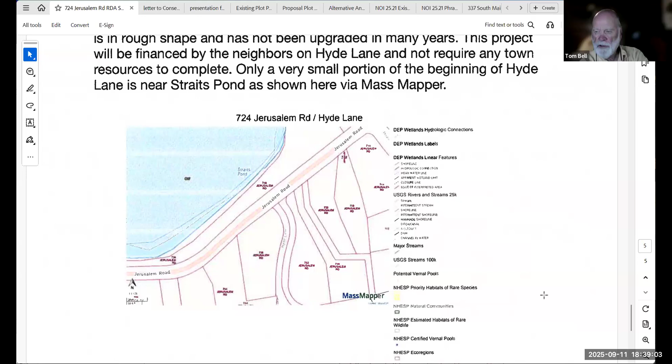Any questions from commissioners off the bat? Yeah, will the whole driveway be repaved or just the apron at the end at Jerusalem Road? Yeah, the entire driveway, it's about 800 feet all the way up the hill. Okay.

Thank you, no other questions? Okay, any other commissioners? Steve, anything? I have no questions. Okay. Kathy? All set, no comments. Straight ahead, thank you. Will? No, it all looks fine to me. Thank you. And Sanjay, anything to add or questions? No questions. Thank you. Okay.

I will make a motion to close the public hearing for Request for Determination of Applicability 25-11 at 724 Jerusalem Road, and issue a negative determination for work within the 100-foot buffer — negative 3 for work in the buffer zone. And then if you want any conditions, you can add them. Yes, I make a motion to issue a negative 3 determination of applicability for the proposed work as shown in the submission documents, with our standard conditions.

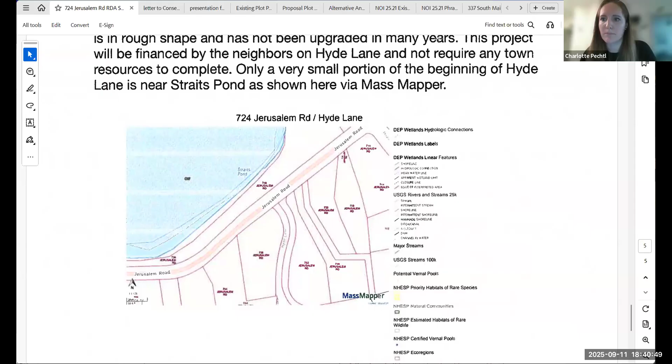There's no special conditions for this, Charlotte, right? You don't have anything unless you want to add? No, I don't think so. Do I have a second? Tom Bell. Second. Thank you.

All right, then I'll take a roll call vote of commissioners. Tom Bell? Aye. Steve Magnell? Aye. Kathy Berrigan? Aye. Sanjay Fernando? Aye. Will Ashton? Aye. And Chris McIntyre, aye. That vote passes 6-0-0. And that hearing is closed.

Thank you. Thank you. Thanks, Tony.

This one should be brief, to refresh everyone's memory from the last meeting. It was an after-the-fact permit required from an enforcement order, which was lifted at the last meeting upon approval from the commission and review of the after-the-fact permit. We were waiting on a DEP file number, so we couldn't issue the order of conditions without it. So there was no further discussion needed. The commission voted to close the public hearing, but within the 21-day time frame you have to issue the order of conditions, so we're pretty much at that mark right now.

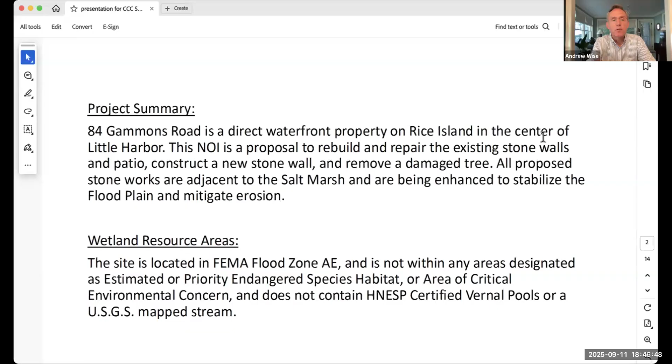84 Gammons Road is at the end of Gammons, Rice Island, which is right in the middle of Little Harbor, Jerusalem, Atlantic here, and we are on the north side. I have a series of photos that will give you a perspective of the property and what we're seeking to do. Just a drone shot from a few years ago, looking south. Gammons Road is right along the front of the home. Our property line starts right here and ends here, and the existing walls are all in the rear of the house along Little Harbor.

Again, this is the north side. This wall is about 60 feet long, and then there are about 4 segments of walls, all in between a lot of ledge here, and that's what we're requesting to rebuild. There's also an existing patio right here, stone patio, pervious, and on this side, the western side, that's where we would like to build a wall. I'll get into this a little bit later, but I'll point out there is an existing wall right here, which we can show when I pull up the current plot plan.

The tree that I mentioned is located right here in front of our guest house. We have a guest house and a main house. Also very important, as I noted in that first slide, key here is stabilization. There's been significant erosion over many years, and that's why we need to rebuild these walls. Of particular concern are these 2 large oak trees, about 24 inches in diameter, that are also at risk because of erosion here for these dilapidated walls.

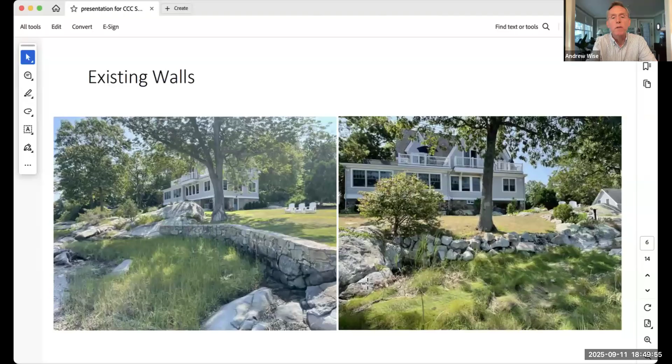This wall is in better shape, that will need mostly pointing, while other walls need more rebuilding. Not many years ago, these walls were a little further into the marsh, and they were poorly redone, aggregated closer into the yard. The salt marsh moved in, but because they weren't done properly, that has perpetuated more erosion. This is the patio we're seeking, with about a 2.5-foot wall behind it.

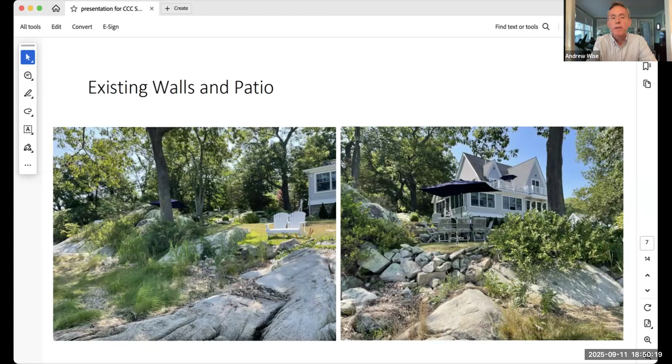The next set of pictures are on the western side, and this was where we'd like to put up that new wall. This view shows where the wall would go, right along here. You can see it's almost a very natural place, almost as if erosion has created this spot for a wall to go.

About 12 years ago, when we bought the property, we had an NOI in 2013 for renovating the two houses. Then we also planted 6 cedar trees along here for stabilization, and now those are also at risk because of erosion in this area.

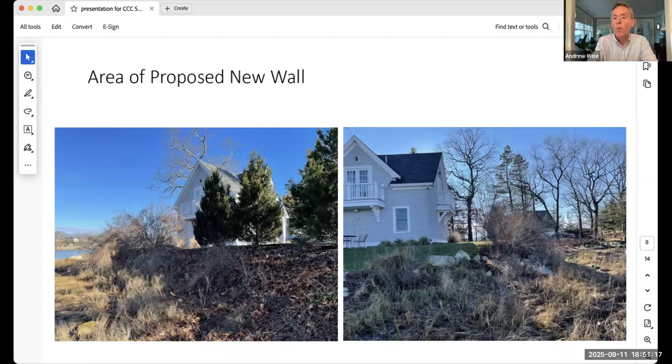This picture again shows where we'd like to put this wall. Some stones here were also moved forward many years ago to address what is the most serious erosion on this corner. This picture shows the driveway, the 6 trees, and the wall would be here just to stabilize this component of the coastal bank.

The last picture is of the tree. This is a black walnut tree, a pretty tree. We really would like to not take it down, but over the last couple of years it's had some infestation, which has gotten a lot worse.

We've noticed recently. About 5 years ago, I had Bartlett Tree look at it. I haven't had them look at it recently, but I will. We're using this as an opportunity to seek your permission so that when an arborist tells us it should be taken down because it's endangering the house or falling into the salt marsh, we'll do it. We're not seeking to do it immediately, but we're monitoring that tree.

I've included a couple slides just from a historical perspective. Our property, we understand, was the first one built upon, from a land plan from 1927. Then in 1956, the property was divided in two, and both houses were rented out.

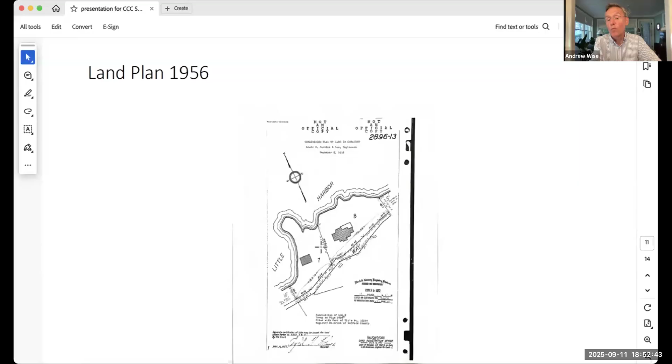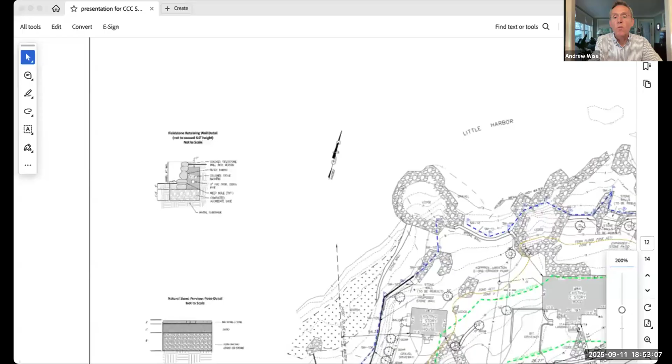And then we have our existing plot plan today from our survey. I'm just going to zoom in a little bit, but if we took more time, you could look at that 1927, 1956, and today. Although those aren't detailed survey plans, they do show the erosion. Whoops, to be careful when I zoom in that I don't change slides as I move that up for you to see.

So what the surveyor has shown is what I mentioned earlier - we presume this was done 100 years ago, a long time ago, when this was all presumably just land, part of the yard. This was a stone wall, and that exists - it goes all along here. But then again, there has been erosion over time.

As you saw from the pictures, just a lot of ledge here. This area may be in better shape, but again, over time there's been a lot of erosion. Last year with those super king tides, we noticed there was more erosion here than in the 12 previous years. So again, we're just seeking to rebuild these walls - this is the patio area here, and then we'd put that new wall here to address that erosion.

I have a couple of the engineer slides just on those walls, but I thought I could go into some detail on the construction proposal. Let me shrink that down again. We will bring in local fieldstone, and we just want all work to match all of the other stone work that's consistent with Cohasset, consistent with the way the current property looks in character.

We feel, as does the contractor and the wetland engineer, Brad Holmes, that the guest house driveway is ideally situated for a staging site. It's right next to that new wall, and it also serves as a nice area to maneuver other materials to the rest of the yard.

Charlotte and I have discussed how the work would be done to minimize any impact on the salt marsh. I think typical remediation efforts would be to put a silt sock in place, but in this case, the only way to really do that would be to put it in the marsh, which is not preferable.

We want to keep everybody out of the marsh. Brad felt ideally this lot works because the work can be done in the yard bordering the salt marsh, staying out of the marsh but doing most of the work by hand, except for the long new wall, where their recommendation is to use a mini excavator on the land side, so the scoop can dig that trench without impacting the salt marsh.

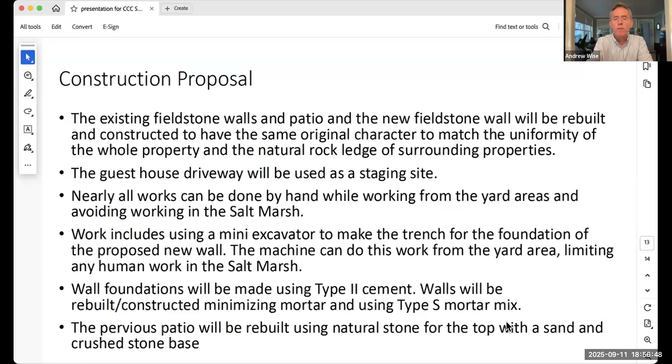So hopefully that's a pretty quick review. I'll open it up to any questions, or I can go back to the existing plot plan if you'd like to address any questions the commissioners have. Thank you for the presentation.

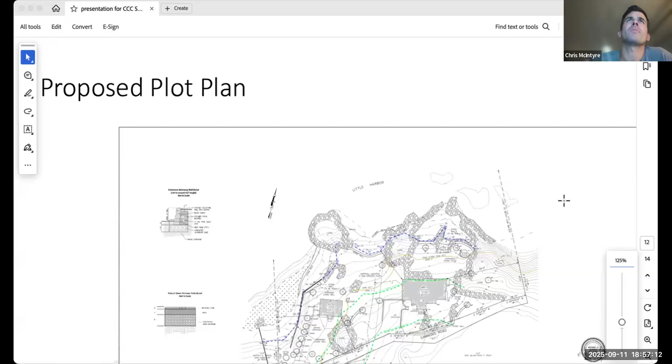The existing walls that you referred to, when were those built? Particularly the stone wall that's more reinforced with mortar - was that part of your 2013 renovation?

No, we believe those walls were all done about 100 years ago. You can see some repair, but in terms of construction, when we had the carriage house rebuilt in 2013, that's all hand-done granite block. The stonemasons thought the wall back here, with bigger stones on the bottom, was done a long time ago - maybe 175 years, but unlikely in the last 50 years, particularly when the houses were done. That would have been part of the whole process. We think it was the 1927 timeframe when the lot was developed.

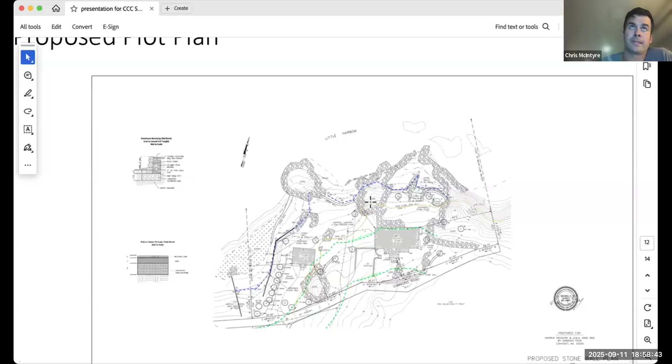And the purpose of the walls is to do what? Did you want to use the walls to prevent further erosion of the bank to the west and north of your guest house primarily? Yes, that's where the new walls are.

Would you say you get much wave energy from that side, or is it just the rising tide? Northeast would be looking out here, so this area gets wave energy.

I believe, say 100 years ago when this was done, this wall was considerably further out and got moved in over time, well before we bought the property. This wall, I think, was here a long time. This area doesn't seem to get quite as much wave energy as you mentioned, but this area does when we get those northeastern storms. That's why this area has had the most erosion, and this area has the most stone and ledge, which has protected it more.

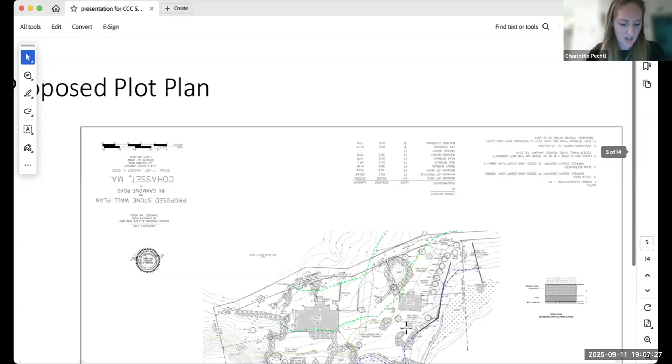I'm not going to read the whole thing, but it says except, to basically protect a structure prior to August 10th, 1978, including reconstructions of such buildings subsequent. There are also performance standards on designing them to minimize, with best available measures, adverse impacts on adjacent nearby coastal beaches due to changes in wave action, demonstrating that no method of protecting the building other than the proposed coastal engineering structure is feasible, and then protective planting designed to reduce erosion may be permitted.

So those are the performance standards as listed in the Wetlands Protection Act. We have additional language in Section 33 of our wetland regs about coastal engineering structures. We do mention the difference between existing versus proposed structures, and we say existing structures may be repaired in a location similar to the existing location, but only to the original length, and if it's protecting the existing house.

We have more on that if people want me to go into it. We do say the dissipation of wave energy should be incorporated into the design without adversely increasing wave action and potential damage to adjacent properties. And then we do mirror what I just summarized for new structures under the Wetlands Protection Act.

Okay, I guess I'm trying to seek your approval. So I would say, to me, there's no question these are all existing walls here. I could make the argument that a long time ago, when this was all part of the property, you can see on this plan there's an existing wall that was built to protect the land. It actually stops here, but it really goes further up to here, and you can see that if you looked at the property.

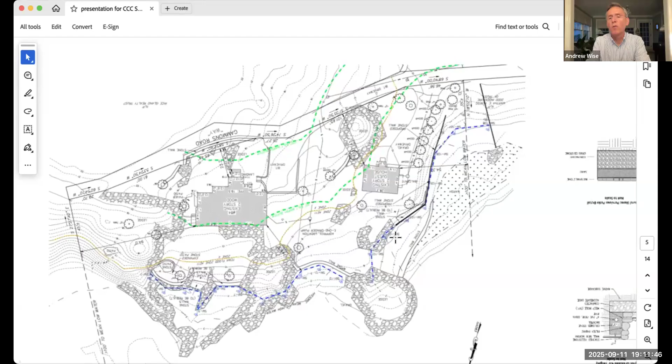I maybe would ask another question too, if I may. Charlotte, we talked about 94 North Main Street, which the commissioners recently approved. I believe that construction was done, and my understanding is that it's relatively similar. In my mind, this work is even better than what they're doing in terms of protecting their marsh, because we can do all the work above the salt marsh and in the coastal bank, and it also is a stabilization effort. So Charlotte, do you see any correlation between the discussion on 94 North Main and what we're seeking here, since that was also an existing wall that got the commission's approval recently?

Yeah, Mr. Chair, do you want me to summarize that other project? It's not on—it was a previously approved, recent project at 94 North Main Street. Sure, I don't know, okay. I voted no for that project.

Yeah, Andy, as we discussed, there was a notice of intent submitted and approved for 94 North Main Street. There was a coastal bank marsh that was eroding. The applicant had, similar to what you were describing, tried to revegetate the area, but used more woody shrubs and stuff. I don't know about grasses, but he did not have success planting those, at least at the toe of the slope. The upper end of the slope was okay, but he tried putting in filter fabric and that didn't work. So he had proposed a new wall.

I think the commission's similar concerns at the time for that project were similar to what we seem to be discussing tonight, in terms of alternatives, storm damage, and wave action. We were concerned about the dissipation of wave action and energy and what the wall would do to that. I believe Brad Holmes was involved in incorporating some plantings—I'd have to pull up the plan to see—but it did not substitute for the construction of the wall. So the construction of the wall was approved to stabilize that bank through a variance granted by the commission.

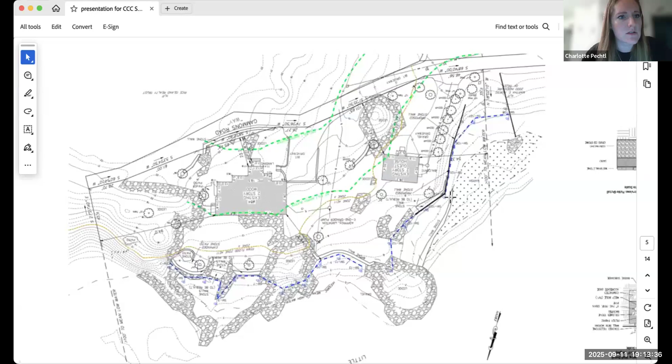Yes, thank you for that summary. I think that argues for the similarity between what the commission did approve there. Having talked to Brad about this project, I've also inspected 94 Main. I know what they did in terms of trying for plantings—they had a much longer, wider area of the toe. In this case, you can see there's a very steep toe here. About a dozen years ago we planted these six trees to stabilize that area, but below it is too steep to do anything. Brad also said there's just not enough space here to do anything.

So I think that would at least say the commission had concerns but did make the approval. And I'd say you've set precedent for what we're seeking to do as well, which is a similar type of project. We also tried similar ways to mitigate that erosion. I do believe, though, the difference in this project is that we can have our wall constructed in a manner that will be much less detrimental to the coastal bank and salt marsh than 94 North Main, because most of their work had to be done in the salt marsh, whereas we can use our driveway and the land to work above, outside of the salt marsh. It would be the same way with the existing walls here.

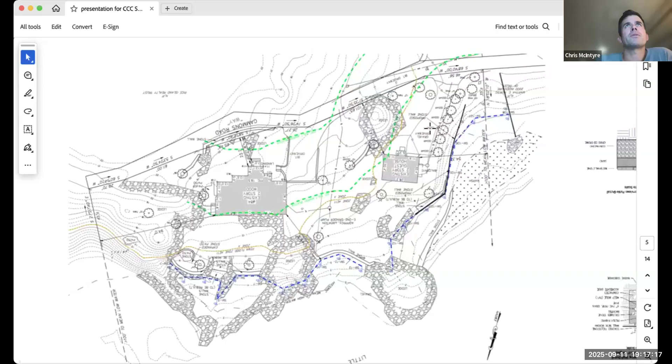Anything else, Steve? Questions? I guess the other question I had was about the existing walls that are in very bad shape—will they be reconstructed using the same stone, or are you going to take that out and bring in something completely different?

It would be mixed. So Steve, the proposal is about 20 tons of local stone, which would be mixed in with the existing stone, so they'll use what's there and add to it so it looks like a uniform wall, very similar to this wall's appearance. So same, but using the same stone plus some new. These are the ones you're reconstructing—yes, adding some new stone and using existing stone, a combination of both. It'll be the same style, same kind of vertical.

Exactly. Yes, the current ones are more of a riprap kind of wall than a wall. I know it looks a little like riprap, and that's just because of how it was piled up, but you can see the mortar in there. Those walls, I have to believe, were once similar to this, and just before we moved in—actually when we did move in shortly after—we had a contractor stack this as part of that NOI, but it is a little more vertical than what you may have seen in the picture.

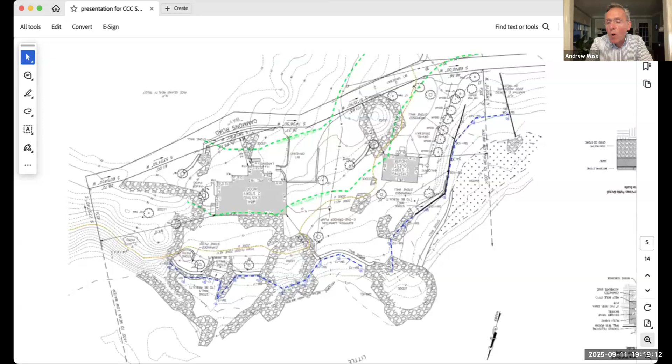This is a current patio area. We had to move it because of erosion. This patio, one time, we believe the stones did go out to the wall. Because of the erosion, we had to remove those stones just because it was sloping down and we couldn't put a table there. But the wall has already been there.

So the plan is to have the stone go all the way out to the wall. If this is the existing stones, then the new patio would go all the way out to the wall, from this wall all the way to the new wall, the rebuilt wall.

So you'd be changing the grade there as well. Yes, getting it back to what I think it originally was, level. Just filling in because there's a bit of a slope here due to erosion, it would be to fill that back in to be level.

So there is fill that would have to be planned to bring in to backfill behind the walls once they're done, again stabilizing the marsh. Behind those trees there's erosion here, so just fill behind those trees when those walls are done.

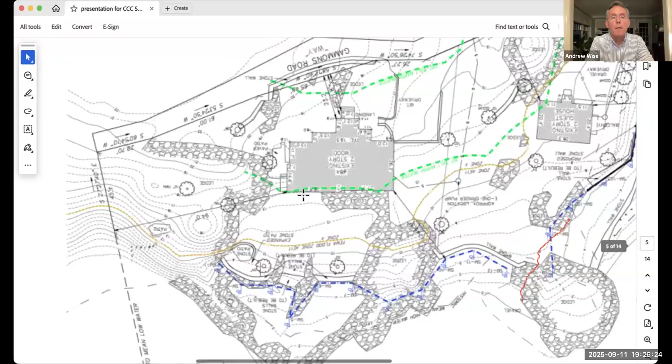Not those walls, back on the northwest side. Yeah, I don't mean these ones. I was just trying to find where we put on the - oops. Sorry, okay, when I zoom out it gets very sensitive, so let me just go down here.

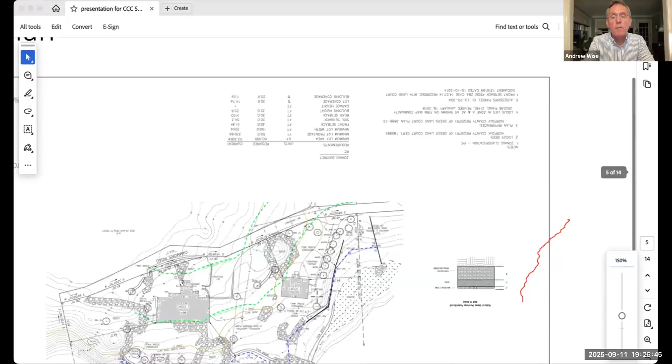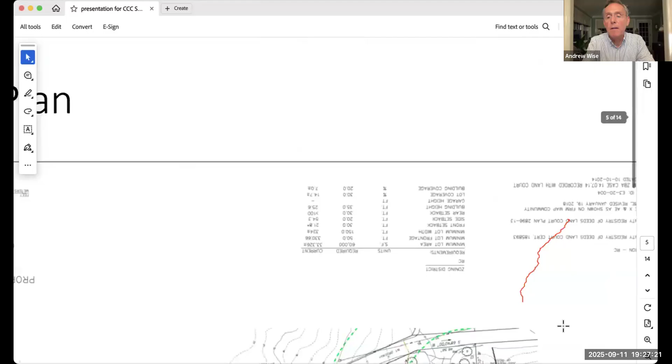So the walls will be a varying height. The highest part of the wall will be right here at 4 feet, and then slope down. I think it just says 47 inches at the highest, sloping down to 0 elevation here, and then up to 47. On the actual request, I think we said anywhere from 2 feet to 4 feet. Let me try one more time - it's a sensitive mouse if I move too quickly. I'm just trying to pull up that breakout where we have the height of the walls. The answer is 0 to 47 inches, or 0 to 4 feet.

So what that applicant did at North Main was to follow a single contour. Your crossing contour is here, so it's climbing for some reason - I don't quite understand why it's climbing up the hill, but it is. He stayed at the same contour and tied the top of his wall into the same elevation necessary to prevent wave action from eroding his coastal bank. That was certainly an issue we discussed - to keep the wall low, tied at both ends to a constant elevation.

The idea here was not a decorative wall. It was not a piece of landscape. It was strictly a measure taken to prevent further erosion of the coastal bank. Completely agreed, and you articulated that well in terms of using that elevation line.

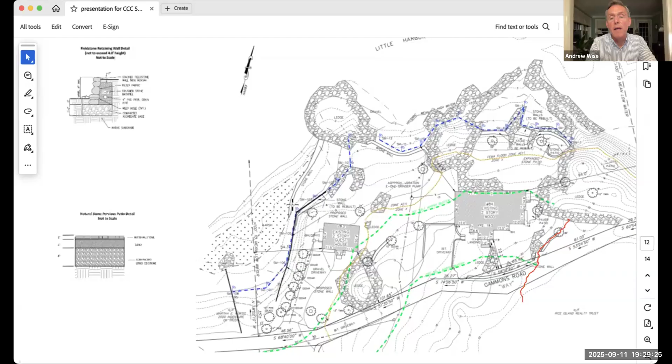Comparing the two properties, that one was level all the way across. This would be the highest part of the wall because of the way the land is and the way this house is - we have to protect the house. The wall slopes down here to 0, goes up to 4, and then from 4 back down to 0. I'll just show - clarify what the black line is versus the blue dotted line.

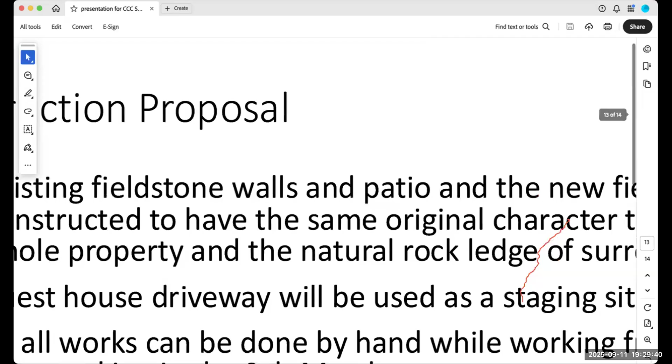So the blue is the edge of the salt marsh, and the black shows the wall that's just adjacent to the salt marsh. The black line at the south end is climbing across. I don't know what those contour intervals are, are they 2 feet? No, they're 1 foot. Let me zoom in. So it's climbing at least 3 feet on its south end, and I don't understand the purpose of that.

He's saying it's getting shorter, so the top of the wall is staying the same elevation. So okay, he didn't say that. You did, Will. Please clarify, is the top of the wall at a constant elevation?

I would say that in terms of elevation, yes, and as the land slopes up, the wall would basically blend into the land that is sloping up. That would be how I would articulate it, maybe in a non-professional way.

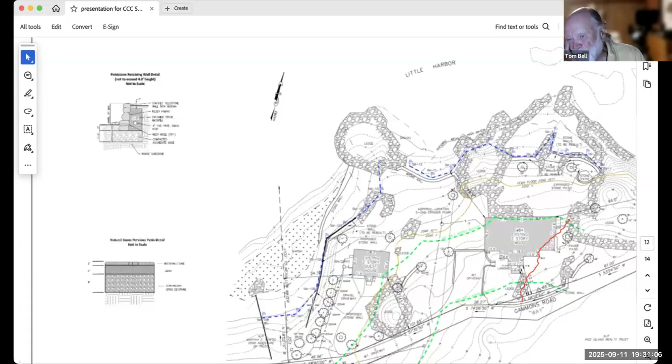I don't understand quite how that works, but I would say it needs to be at a constant elevation, top of your wall. Right, and I agree. Whether it's 3 feet or 4 feet, whatever it is, it needs to be at a constant elevation. We're in complete agreement, and if I could just, I want to go back to a picture.

I don't agree with that, because if it contours to the land, the top of the wall has to maintain the same elevation, not the same height off the ground. Oh, yeah, that's what I'm talking about. Oh, okay, I think we're all saying the same thing. I'm not talking about the height of the wall in this case, I'm talking about the elevation of the top of the wall. Yeah, the elevation above sea level, right? Right. Okay, got it. That's the only thing that makes sense, really.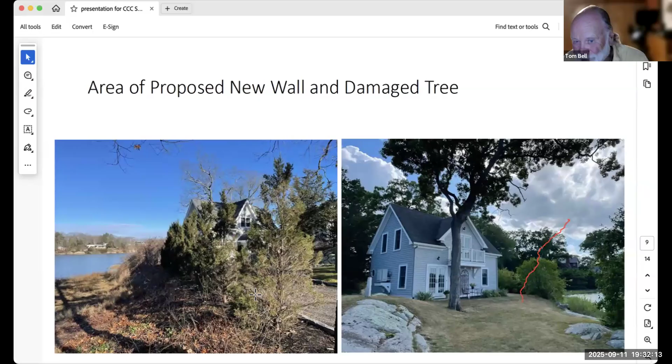We're trying to protect, the applicant's trying to protect the coastal bank from further erosion. If there's been any erosion at all, I haven't seen evidence that it's actually eroding. I think Charlotte, if you could, you've walked our property earlier this week, you could talk to the commission. I want to weigh in on that, because until you pointed out the specific area that was eroding, I was with Tom that I didn't see anything and didn't support a new wall here.

But when you look at Nearmap from 2014, 2015, 2016 to today, right at that corner of the house, you can see, based on the shadows, that specific area is eroded, the coastal bank, not out in the mud flat or whatever. Well, let's take a look at that.

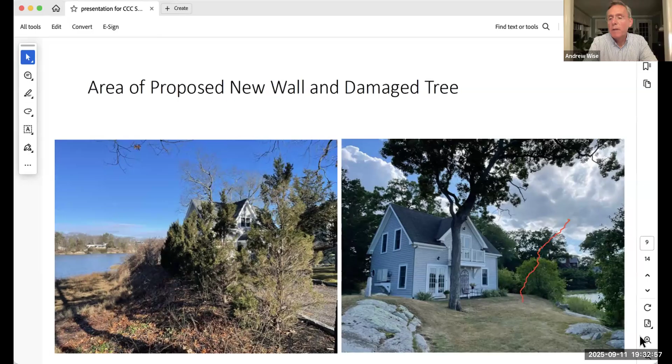If this picture helps, and again I can zoom that, but just so we're all in agreement, we have the elevation of the driveway, and it's a flat driveway. You can see how, if this is the wall, if the elevation of this wall stays the same, then the wall itself will increase in height at the same elevation, just because the way the land, the elevation decreases as you go up.

We're talking about the top of the wall, not the foundation of the wall necessarily. Yes, exactly, that's what I'm saying, the top of the wall. So we need to establish what that elevation needs to be. We were able to do that pretty well, I think, on North Main, and then determine what elevation the top of the wall needs to be.

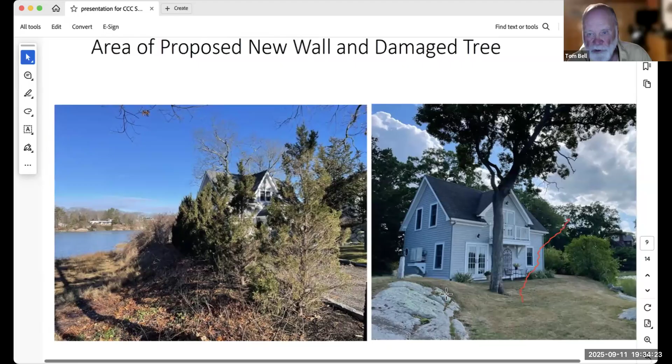In this case, it's not entirely clear to me what elevation we're talking about. I can get back to you, we're just conferring with our surveyor, but I would say the elevation would be right at that point of most erosion, and whatever that elevation is, that's what would be the elevation of the wall. Well, that elevation will, lots of things, you're going to put a wall that's, I don't know, from this picture it's hard to tell, but several feet above the marsh at least. You're going to put the wall at the top of the coastal bank?

Well, this picture again kind of helps to show it as well, so you can see just the way the land, here's the marsh.

I'm going to interrupt for just a second. One of the things that helped me, and I think other commissioners, understand the situation much better, was for us to go out and take a look. I would agree, and I don't think we should consider discussing it a lot more until we've actually had a look, so we can understand what we're looking at, and we should be there with your engineer.

Have you engaged a coastal engineer for this? Brad Holmes was our wetland scientist, not a coastal engineer. I've not engaged one, but I've talked with Brendan Sullivan. He's a professional engineer, though I don't know if he's a certified coastal engineer. Well, I'm sure Brendan would be just fine.

I think we should be out there with the engineer, and he can explain what's to be built and how, because we're going around in circles here. Part of it is mainly misunderstanding what the other people are saying. So I think first of all we should take a look out there. That'd serve everybody well, I think. Okay, let's just, before we decide on the next step, move through the rest of the commission for comments and circle back to that.

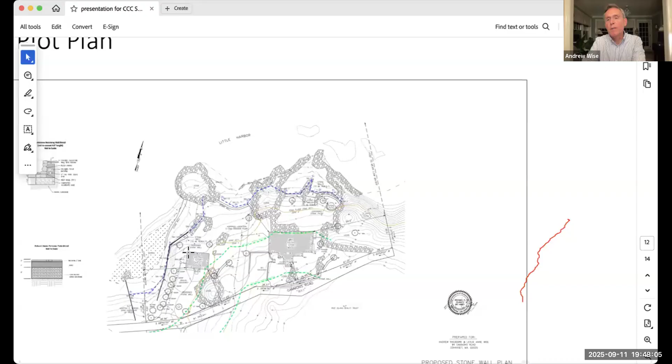I prefer that. I'll be traveling all next week, and I don't think, even if I were here, I could do it that quickly. But October 9th, if that's all right, that would be my request. Yeah, that's fine.

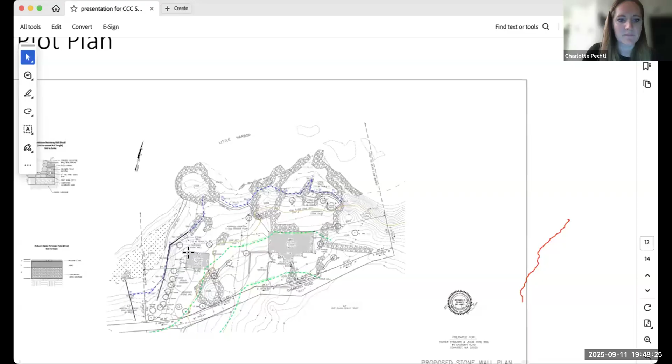All right, thank you. Next up, we have amended NOI 24-14. In accordance with Massachusetts General Laws, Chapter 131, Section 40, the Cohasset Wetlands Bylaw, and the Cohasset Stormwater Bylaw, the Cohasset Conservation Commission will hold a remote public hearing via Zoom webinar on Thursday, September 11th, 2025 at 6:30 p.m. for amended notice of intent 24-14 to add utilities underneath the proposed 12-foot gravel driveway found within resource areas and buffer zones for Charles Higginson at 32 Lothrop Lane. The public is invited to offer input by attending the meeting or emailing cpectel@cohassetmass.gov.

Hey, Brendan, good evening. For the record, Brendan Sullivan, Merrill Engineers and Land Surveyors, here representing the owners and applicants, Charlie and Geneva Higginson of 32 Lothrop Lane. So this was a plan that was approved last year, last August or so.

For a gravel driveway and some mitigation areas off of Lothrop Lane to access a proposed dwelling. During that time frame, the Higginsons weren't exactly sure where they were going to end up, so they ended up with the purchase option of this lot, selling the main house. And so now they're proposing to build a house for themselves on the upper portion, the rear portion, the buildable portion of the lot. Still going through the phases of selecting a footprint and a layout and all that.

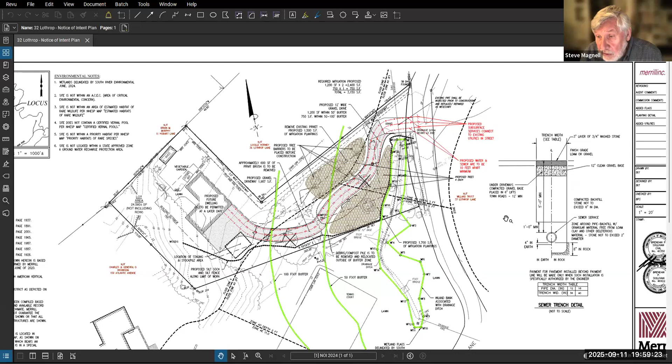So to get 5 feet down for these utilities, what's your depth? What are we looking at for a trench? And where will it come out, right to the street, or will it have to go into the street? How long will you have to go up into the street to make the connection? Yes, we'll have to go to the street to make a connection. I believe the sewer is on the opposite side of the street, so there will be some crossing connection there. So we will have to go into the street somewhat to connect to both the water and the sewer. For telephone and electric cable, I believe there's a utility pole off the plan up in this area, so I'm not sure if we'll use the utility pole at the end of the street, end of the property, and then go overhead from there, or go subsurface. I'm not quite sure at this point.

All right, Steve, does that answer your question? Do you have any other questions? Yeah, I think this is gravity sewer as opposed to pumped sewer like we got. Nope, this will be an E/One grinder pump. It's all pressure sewer down in this area. Okay, so it's not a 12-inch pipe. No.

And so none of these trenches will be particularly wide? No, the service we were talking about is really a 1-inch pipe for both services. I think the sewer might be 1.5 inches. I think there's a 2-inch service out in Lothrop Lane now. So they're small pipes, not a 6 or 8-inch diameter pipe.

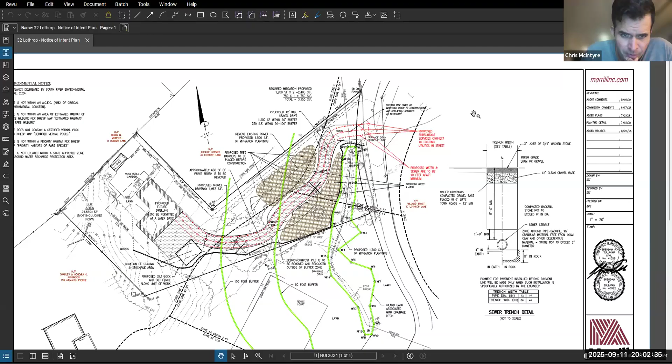So it's gonna be a gravel driveway, so what kind of excavator are we talking? You don't need a really big machine. We've done test pits over by Hobart Lane and most of it is sand and gravel, mostly beach sand, so you don't need a big excavator for this. A rubber tire backhoe could probably take care of this, no problem.

Tom, do you have any questions or comments? Brendan, is there any exposed bedrock in the neighborhood? In the neighborhood, yeah, when there's exposed bedrock on the lot itself, out in front and up at the higher elevations. Down in the lower elevations, there really isn't much of any. Obviously there's ledge outcrops up by the beach and the seacoast, so you really can't assume that it's all going to be easy digging.

We could run into boulders or ledge, and if we do, we'll make a decision whether we either have to chip it or insulate the pipe. It matters what the depth is at that point.

Is it feasible, does it meet code, if you could put the electrical service in the same trench as the water? I don't think the water department usually likes anything over the water service in case it breaks. And now you'd have to dig up the conduit as well as the water. The electrical service is a shallow dig, only 2 or 3 feet down, as opposed to needing frost protection. But typically the utilities don't like other utilities in the same trench, or one on top of the other per se.

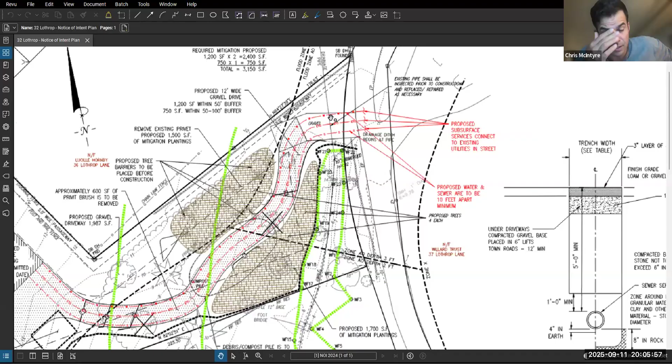Oh, there you go. Lucille Hornby of 36 Lothrop Lane says this drain pipe is not deep, if it is within 5 feet or less. I think it's less than 5 feet deep, I think that's what she meant. Sure, the drain pipe that crosses the driveway, the existing one. Yeah, so this drain pipe right here, it's a 10-inch pipe, the invert is about 4.92, so call it 5 feet.

So the top of the pipe is probably about elevation 6. We have elevation 8 and 9, so it's about 8.5. So we realize the top of the pipe, there's only about 2.5 feet of cover over it right now. So yeah, we know that's less than 5 feet.

And you've acknowledged that you're gonna have to do something about that, right? Yes, absolutely. So whatever happens, the pipe is gonna be in better condition after, would you say? Yes, most likely, yep, absolutely. Do you think that pipe's adequate? The diameter of the existing pipe, is it adequate for the size of the drainage above it?

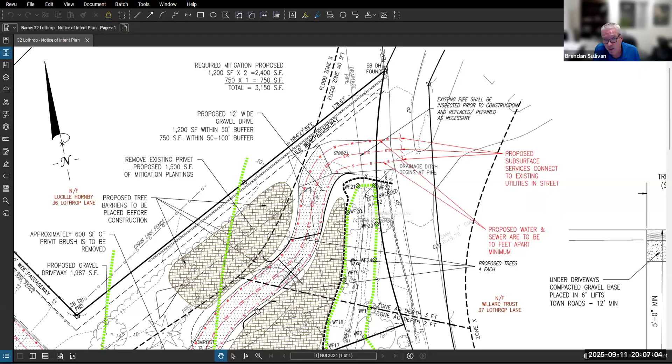It might be adequate, it's just a matter of how clean it is. As you can see, there's the word submerged here, so it is usually submerged. You gotta dig down to get to the invert of the pipe. Because this trench usually gets mucked in or filled in. There's constantly water - this pipe is only at elevation 5, so at a moon tide, the seawater does come up into here. You get brackish, you get fresh water, or heavy rain from Hobart.

You get leaves and everything else. I don't think it's - I mean, you could put a 36-inch pipe there, it's not going to alleviate the problem over at Hobart Lane. So I don't think it's the size of the pipe, it's just the maintenance of the swale and the inlets and outlets of the entire system, if that makes sense.

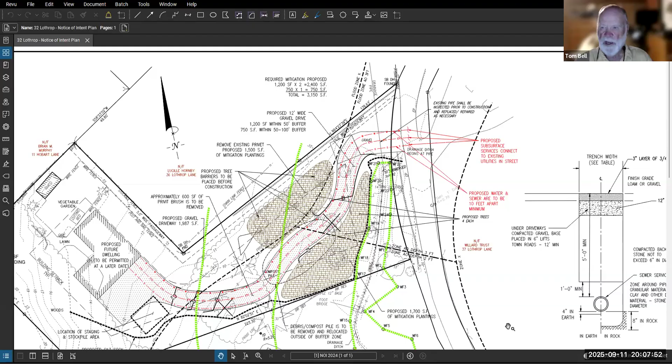It seems to me there was some issue, I could be mistaken, but some issue of flooding on the north end of this pipe. There's another house over there, and I realize the gradient's extremely low here. You're almost at sea level and it is tidal at times on high tide. So I just wondered if you're going to have to replace the pipe, whether it would be wise to oversize it a bit. That'd help.

Yeah, we could look at that. Not too many places make a 10-inch pipe. It might be, maybe we do a 10-inch cast iron water main piece in there instead, that might give you some better flows. That most likely might be the solution, as opposed to a class 5 concrete pipe. A steel water main pipe might be better suited for that.

What's the advantage of that over concrete? Well, you have a little bit more cover, it's shallower. The thickness of a class 5 concrete pipe is about 2.5 to 3 inches, whereas a steel water main pipe is only... Oh, I see, so the inner diameter is greater, is what you're getting at. Yeah, okay.

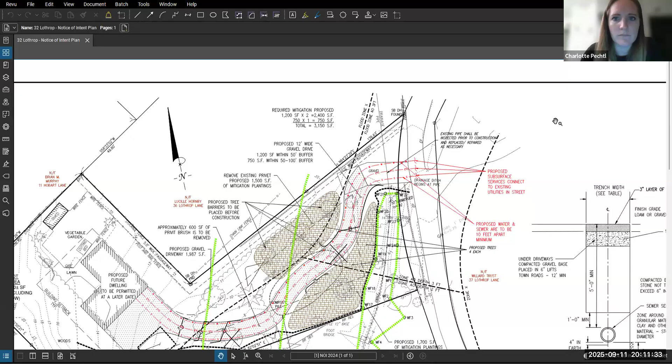I think that's it for questions so far. If I see any pop up, I can... oh, sorry, Steve. Oops, sorry, pushed the wrong button. You're raising your hand, okay. I was just trying to close the Q&A thing I had open.

Got it, thank you. Charlotte, I think you'll address this in your proposed conditions, but with earthwork, this is my only concern. My condition would just be, and this is typically addressed in our standard conditions, the erosion controls, sedimentation controls, covering the stockpile, that sort of thing. But I'll let you go through.

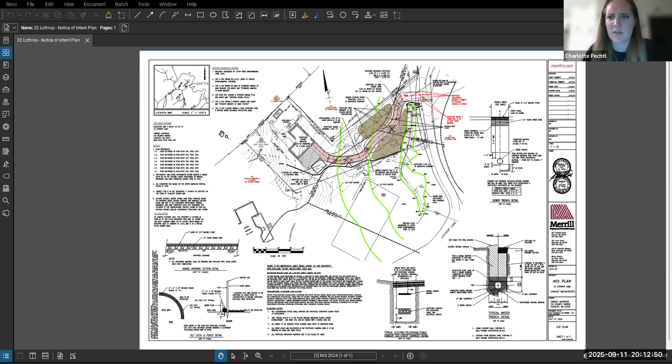You mean in terms of construction management? Yeah, the trenching and soil management, the earthwork that's going to happen for these utilities. Yes, we have standard conditions about erosion control, keeping sites clean, staging, stockpiling. I'd have to double check our template if we have anything specific on soil management, but I can add that. Brendan, do you have that on the site plans already for soil stockpiling, staging, equipment? We just specify a location of the staging and stockpiling area. If you want to add a condition that stockpiled soil needs to be encompassed by additional siltation beyond what's shown on the plan, that's fine.

But like I said, I think most of this will be cut and cover per day. It'll be a small enough trench where there's not going to be piles of dirt everywhere at the end of the day. It'll be small, but you're replacing with sand, so there'll be some spoils, of course.

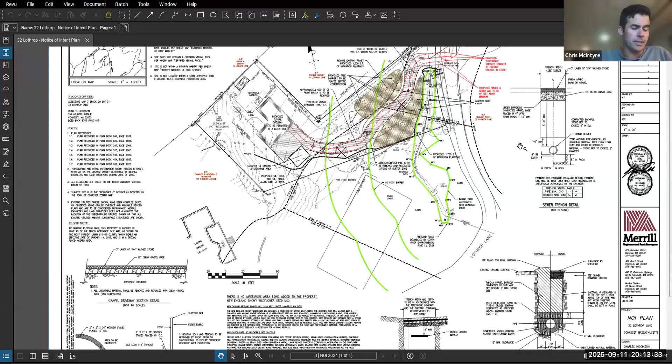All right, good. Charlotte, are you ready with your conditions? Yes, hold on, sorry, I just got to change the view so you guys can see the changes that I made. And Brendan, I'll take over. Thank you.

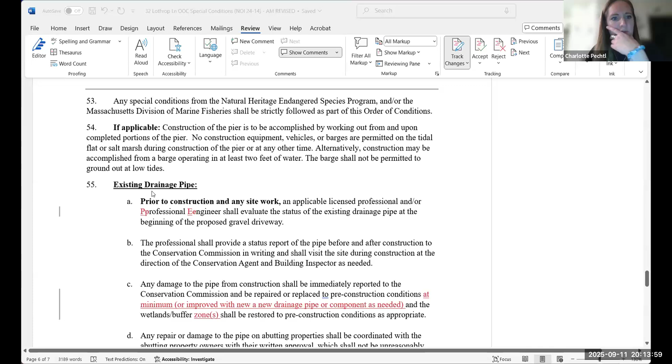Okay, so from 55 downward, these are the conditions that were proposed under the original order of conditions for the gravel driveway. As you can see, we had a handful of conditions already prepared for the existing drainage pipe. I won't read them word for word, you guys can read them as I go along. I'll just read the edits in red that I made in regards to the amended NOI request.

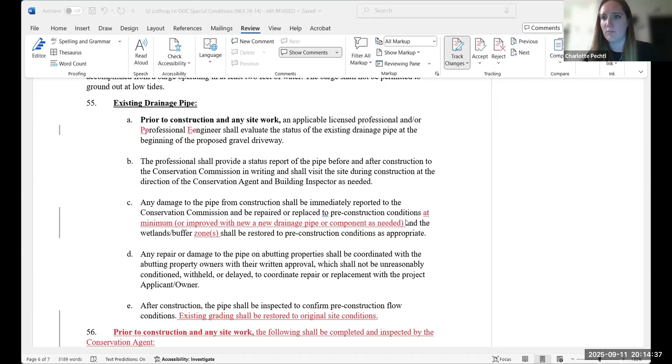So for 55C, in terms of damage to the pipe, I wrote: repair or replace to pre-construction conditions at minimum, or improved with a new drainage pipe or component as needed, as Brendan had acknowledged during the hearing that portion of that pipe might need to be replaced when they dig out the trenches. And I just added buffer zone as a word.

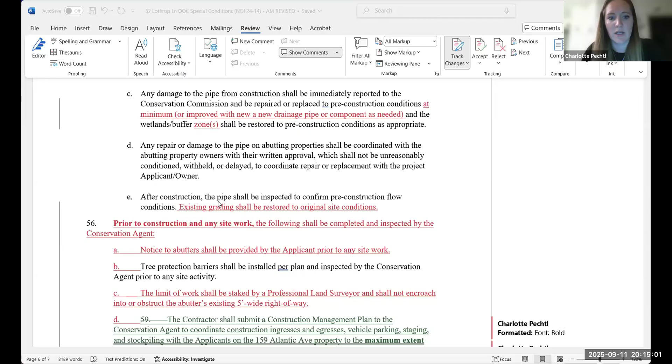And then for 55E, I added the language here: existing grading shall be restored to original site conditions, and the pipe shall be inspected to confirm pre-construction flow conditions after construction, to make sure that the pipe is functioning as it originally did, or possibly improved. And then existing grading to be restored to original site conditions.

Added a few additional conditions for prior to construction, so kind of grouped these together. So prior to site construction and any site work, the following shall be completed and inspected by the conservation agent. Notice to abutters shall be provided by the applicant prior to any site work. I left that general, just so whatever the applicant thinks is best to notify all abutters, I'll defer to them, unless we want to require written notice.

And then added another condition here about the limit of work. The limit of work shall be staked by a professional land surveyor and shall not encroach into or obstruct the abutter's existing 5-foot wide right-of-way. That was a comment from one of the abutters who was concerned about that being obstructed during construction. It didn't appear that that was within the limit of work, but I just wanted to add this language to make it crystal clear.

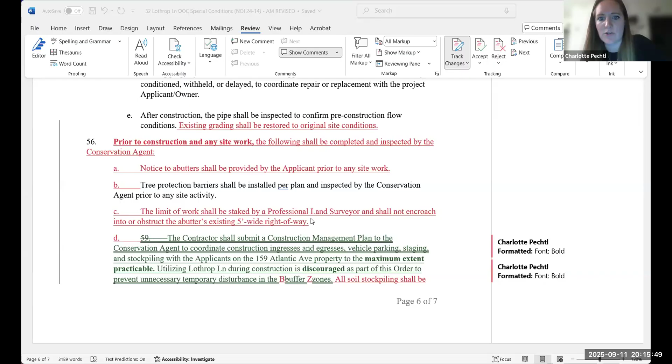And then this language in green is already existing, by the way, I just moved it to the pre-construction conditions. And then I added a sentence, Chris, as you had talked about: all soil stockpiling shall be covered at the end of each workday to prevent any erosion and sedimentation into wetland resource areas and buffer zones.

And then as part of the construction management plan, the applicant shall consult on traffic control and management with their contractor and the Cohasset Police Department, and any traffic plan shall be approved by the Cohasset Police Department as applicable for a private road.

Just to be mindful of, we already have language in here that utilizing Lothrop Lane during construction is discouraged as part of this order of conditions, to prevent unnecessary temporary disturbance in the buffer zones. So we already have language about providing a construction management plan to understand where the vehicles are coming, going, parking, staging, utilizing the 159 property, the abutting Atlantic Ave property, to the maximum extent practicable to not block Lothrop Lane, and then just adding this additional language about traffic control.

Typically that's outside of the jurisdiction of the Conservation Department, unless there's any issue with damage to a resource area or buffer zone. So I just kind of said, in terms of collaborating with the Cohasset Police Department, I don't know what kind of plans that they would require for a private road, but I think it's necessary to at least consult them and make sure the contractor and the police department are on the same page in terms of coming and going, installing things. National Grid would obviously need to be a part of that discussion. So I don't know if that language is sufficient, but I'll keep going.

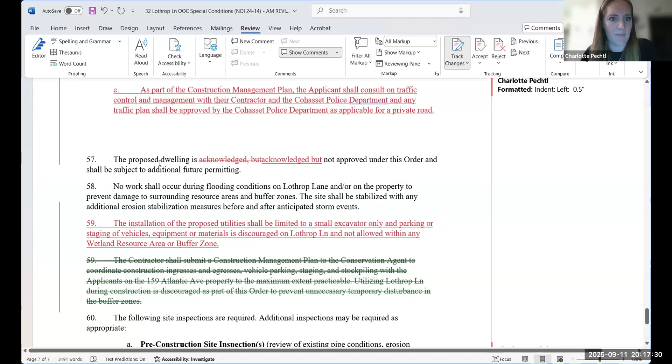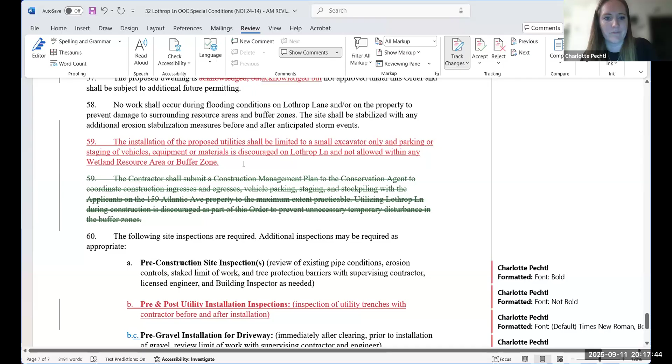Proposed dwelling is - oh sorry, that's a typo. And then I added this language: the installation of the proposed utilities shall be limited to a small excavator only, and parking or staging of vehicles, equipment, materials is discouraged on Lothrop Lane and not allowed within a resource area or buffer zone. So just kind of reiterating that throughout construction, not just prior to construction.

And then added an additional two-part visit for just inspecting the trenches with the contractor before and after installation, just given the sensitivity of being near the wetland resource areas, the drainage pipe, et cetera. Normally I do not do this for construction projects, just to make it clear, but I'm happy to do this for this project, just given the multiple sensitivities that we're dealing with here. And that's it.

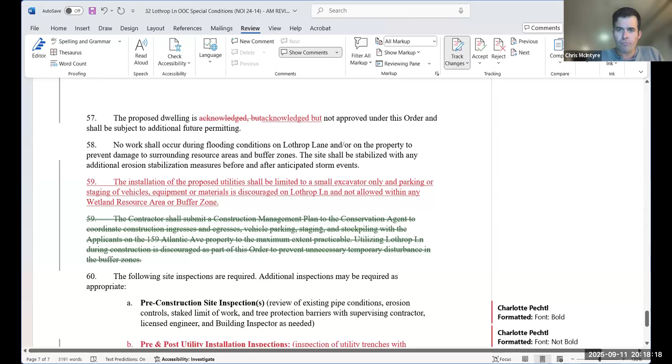Anyone else before I make a motion? Can we just look at 55 really quick, Charlotte? Yeah, sure, let's scroll back up.

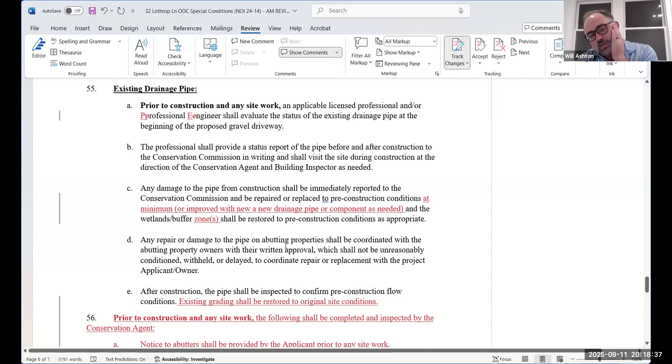Part E, after construction of the pipe, existing grading shall be restored to the original site conditions. The way that reads is that all the grading is going to go back, but the plan doesn't show that, the plan has different grading. So is that specifically supposed to relate to the pipe? Oh, I'm sorry, yes, I can say that. We weren't changing grade except for a few very minor modifications, but I wouldn't want it to be in conflict with our drawing. Does that help for the drainage pipe? Yeah, that makes it clear that it's only talking about the pipe, in terms of grading elevation, like where the pipe is directed and whatnot.

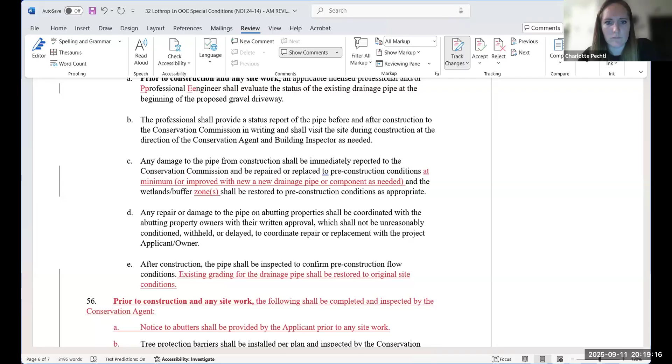Good. Does anybody else want me to go through the other ones? Anybody have any edits, comments, things to add? No, thank you, Charlotte, I don't think so.

Okay, then I make a motion to close the public hearing for notice of intent 24-14 at 159 Atlantic Ave / 32 Lothrop Lane and issue an amended order of conditions with our standard special conditions and the revised conditions as previously shown on the screen and read by our conservation agent, Charlotte.

Do I have a second? Second. Thank you, I'll take a roll call vote then. Tom Bell, aye. Steve Magnell, aye. Kathy Berrigan, aye. Will Ashton, aye. And Chris McIntyre, aye. That vote passes 5-0-0.

And we'll also need an amended variance. So I'll make a motion to issue an amended variance for notice of intent 24-14 at 159 Atlantic Ave / 32 Lothrop Lane for work within the 50-foot buffer zone to the inland bank and the intermittent stream to complete the additional proposed utility work as shown on the approved plans.

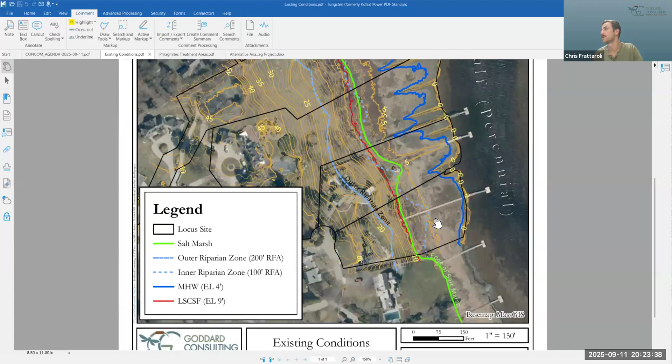We took the opportunity to essentially develop a little GIS, what I'm calling a GIS site plan. We used LiDAR data for contours publicly available from MassGIS, so these are 1 foot contour intervals, with major contours labeled every 5 feet. We also identified elevations for mean high water of the river, as well as the floodplain, at elevations 4 and 9 respectively. The bold blue line tracks at elevation 4, the mean high water line of our river in this reach. We also have land subject to coastal storm flowage, the bolded red line at elevation 9, that's the 100-year floodplain. We did also draw in an edge of salt marsh line, shown here in green. Based on discussion last time, to reiterate, this is not field delineated, but is a conservative approach in how we're showing this for this graphic.

On the plan, we have 2 dashed blue lines. These are our inner and outer riparian zones, the 100 and 200 foot riverfront area. Just added some notation at the top that this is for future reference for the next people to look at this plan - it's not based on a field delineation, so this is not perfectly precise. It's approximated, and we're using those LiDAR contours for the purposes of elevation here. For what it's worth, we've found them to be exceptionally reliable, especially in areas with little or no tree canopy.

So this is what we put together for a quote unquote survey plan. I did go ahead and overlay our Phragmites treatment areas on top of that. We kept them separate for the sake of some clarity in looking at existing conditions, but we're also showing basically the exact same thing along with those treatment areas. It measures just over 35,000 square feet, so about 0.8 of an acre overall as we span up and down these 6 parcels.

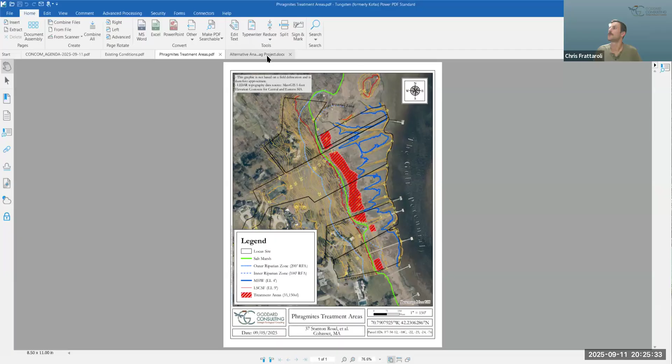Tanner also put together a little alternatives analysis and a slideshow of some of their Phragmites work on Nantucket. So I can share my screen with that unless you have it handy, Tanner. I have it, Andy. All right, sounds good. I'll turn it over to you then. Gotcha.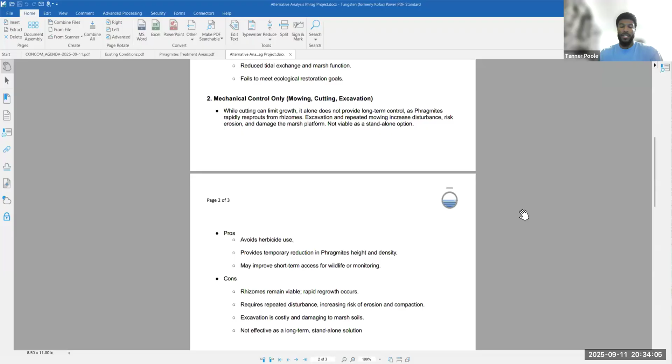While we do stay away from using herbicides, this also just lets rhizomes stay in place, which again allows them to continue to grow. Yeah, kind of good there.

It is labor intensive and can be somewhat difficult in some muddy, tidal-influenced areas depending on the tide. I'd agree it's difficult and unsuitable for large, dense stands, but it's feasible for more isolated patches in sensitive areas, not for larger scale management of Phragmites.

It's very precise—good for small patches and sensitive areas where we're concerned about spraying in natural heritage areas or any species-protected area. But it's very labor intensive, time consuming, and impractical for large stands.

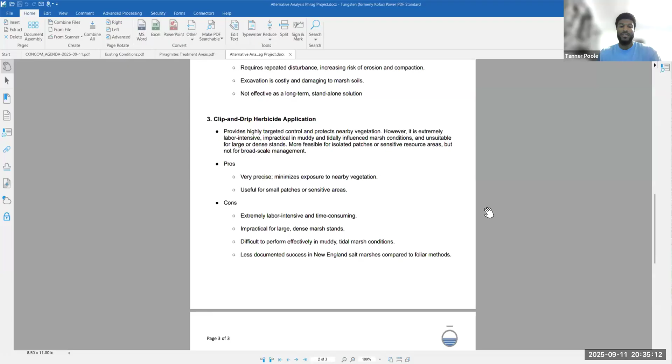Number 4 would be foliar herbicide application with cutting. Foliar applications have been proven very effective at managing large, dense stands of Phragmites. It gives systemic control of the Phragmites, and it's cost effective and efficient.

It's less labor intensive, with less soil disturbance than the other options. Cutting helps remove the dead biomass and improves penetration for native species to recolonize in those areas. Of course the cons are drift, which can be mitigated by watching the weather, and the use of herbicides raises concerns.

So in general, after evaluating all of our alternatives, foliar herbicide application with cutting seemed the most practical for the situation we're in—dealing with a large, dense stand of Phragmites—when our goal is to introduce native species back into the area. These actions help prove why this would be the best way to do it.

There's a proven track record for this approach, and that's what we want to do to help improve the wildlife habitat and improve the growth of native species. But that's about it. Thank you.

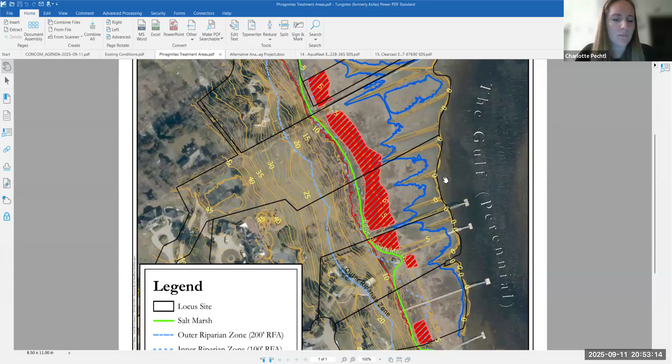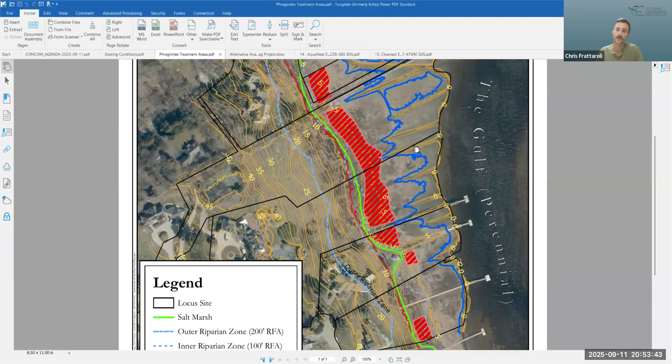Right, so just to reiterate — I walked through this previously — blue is elevation 4, that's mean high water in this river. Green is the edge of salt marsh. The red line is the 100-year flood elevation, and the two dashed blue lines are the inner riparian 100-foot riverfront area and outer riparian 200-foot riverfront area. These red hatched areas are our Phragmites treatment areas. There's really one big bulk area, separated by a dock in a couple of places, but there are also a couple of smaller, more standalone portions.

I would just say that the use of the digital elevation model is acceptable to me. We've seen other applicants use this, and also have follow-up surveys that establish that the errors in the LiDAR surveys are more or less equivalent to RTK surveys with conventional, high-tech survey methods. So this is probably as good as having us professionally surveyed, maybe better.

Yeah, I think that is true, Mr. Bell. There are probably millions of data points across these parcels, whereas you might be lucky to get 1,000 out of an on-the-ground survey. Millions per square meter, yeah.

Okay, any other comments, commissioners? So where we stand, it seems as though there's at least a couple commissioners who are not in favor of the herbicide approach. I, for one, would want more information about what the finished product should look like, what plants would be at this elevation, what native plants we're looking for, and the consideration of what the improved outcome would be.

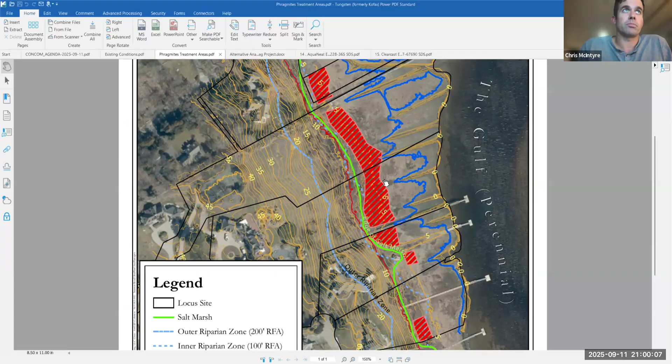I think if anything, if we were gonna continue this again, I would be exploring more of the mechanical alternatives and options to try to revegetate or reintroduce natives to the area. I don't think just a foliar spraying approach alone is gonna be approved. I'm not getting that sense.

So I guess I leave it in your court, based on what we've discussed today, to reassess, talk to your clients, and see what they're willing to do. Absolutely, we very much understand and appreciate your feedback here. I think we've got some good direction. Assuming we are gonna proceed down this route, we definitely have to decide what the tolerance is for perhaps other methods, et cetera. I probably got a few paperwork things to iron out with Charlotte on the back end.

And I think we would, with that—because I don't have the benefit of conferring with the applicants right now, can I request a continuance to your next hearing, with the understanding that that may get bumped out one more?

I'll just let you know it's a little sooner than two weeks, so it would be a Tuesday instead of Thursday. Just keep in mind you'd need to provide documents the Tuesday before. But if you want to continue to 9/23 for now, just let me know in writing if you need a continuance to another date, that should be fine.

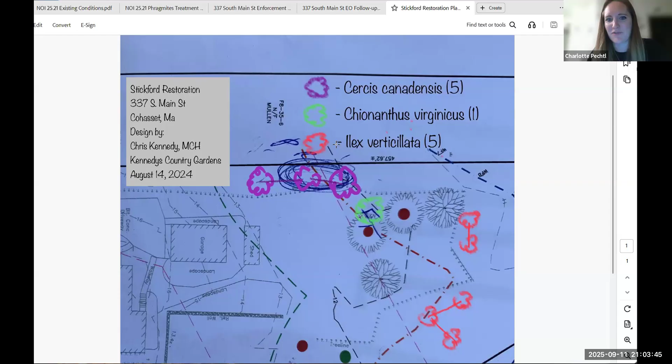So per the enforcement order and follow-up, he had some instructions. After the commission approved the plan, he was informed to install the plantings by November 15th, 2024, which he did. I went over to the site and saw that the 5 trees were installed.

We did switch where the shrubs were—put some on either side, still in the same buffer zone, but not all 5 in a row. So we spaced them out a little bit more.

And then the second instruction was to contact the agent one year after the completion of the plantings to inspect the plantings and discuss any replacements.

The trees—I was over there a couple weeks ago—are in good shape. I didn't see any signs of stress or anything. He says he's keeping them adequately watered. The shrubs, some of them got eaten a little bit by deer, but they're still alive. So I didn't see any issues with the plantings.

I can't remember why, and I'm sorry I didn't have time to look at this beforehand, but we only required a one year monitoring period. Usually our standard is 3. So since the applicant has completed all of the requirements from the enforcement order and the follow-up...

I think you guys can make a decision on whether or not you want to lift the enforcement order with an acknowledgement that he's just going to continue to maintain the plantings, or if you want to revise it and keep it open for the 3 year standard period. But there was a reason why we specifically said only 1 year, so that's something I'll just note. I'm sorry I didn't have time to confirm that and watch the old hearing, but we did specifically say 1 year, not 3, for whatever reason.